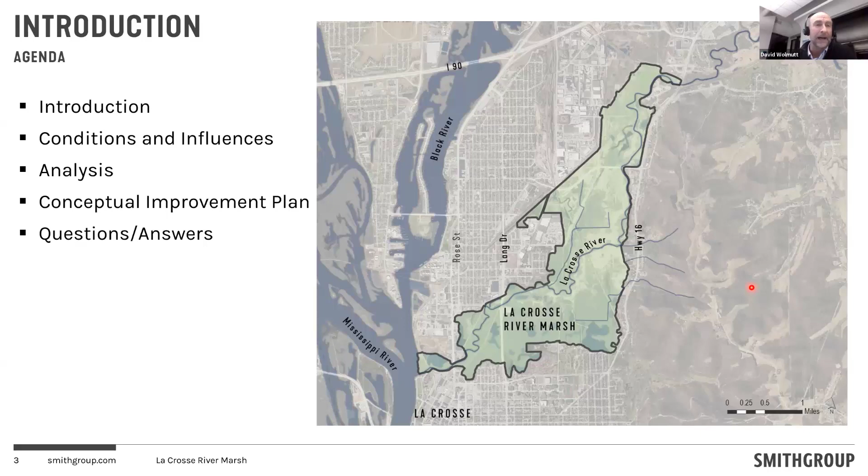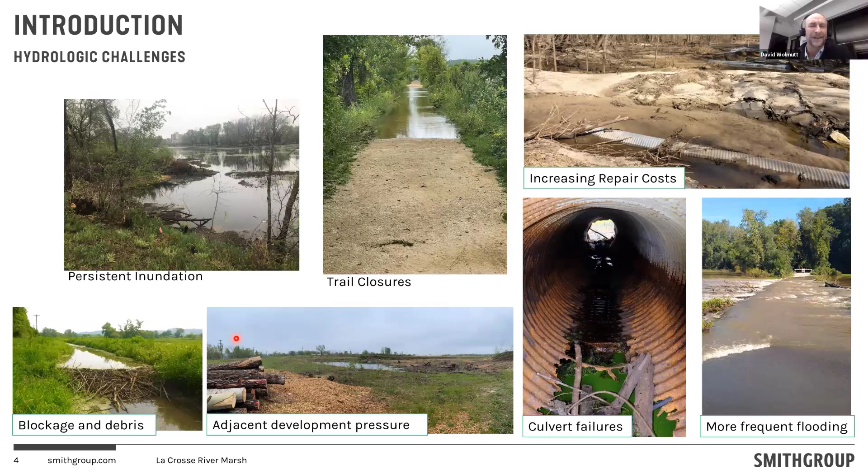There are development pressures that we want to make sure the marsh is protected against. And of course, the ongoing issues with our friends, the beavers, which slow down drainage, and they're a natural feature, but they can be a nuisance sometimes.

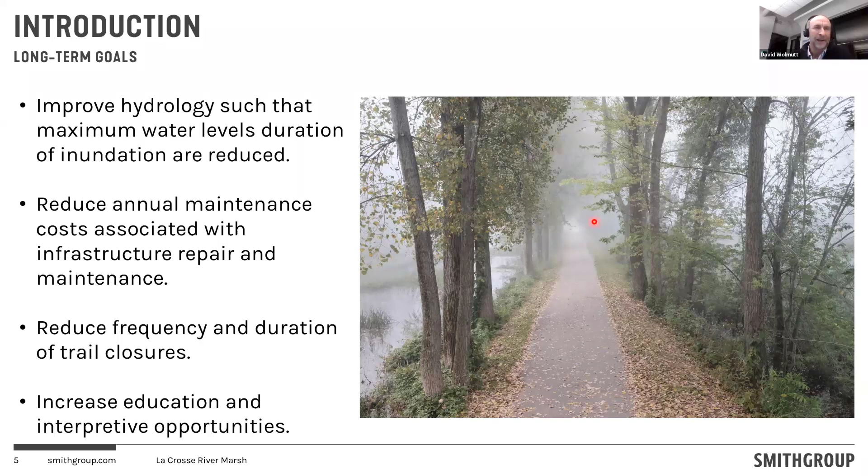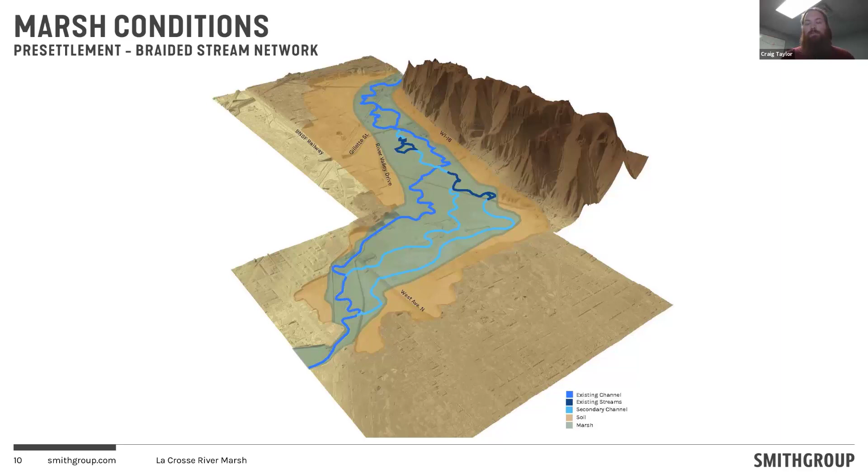Next slide, please. So by looking at some of the channel scars, every time a channel moves through a landscape, it leaves a scar on the surface. And by looking at some of the scar patterns, we believe that there were at least 3 different channel alignments through the marsh at some point in its history. And they've been forced into this single channel due to encroachments in the floodplain. So some of those encroachments are roadways, rail lines, abandoned rail lines, trail crossings.

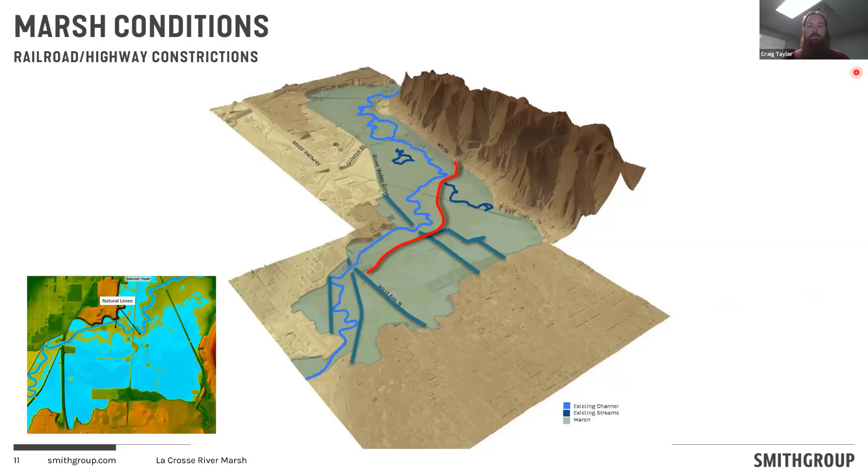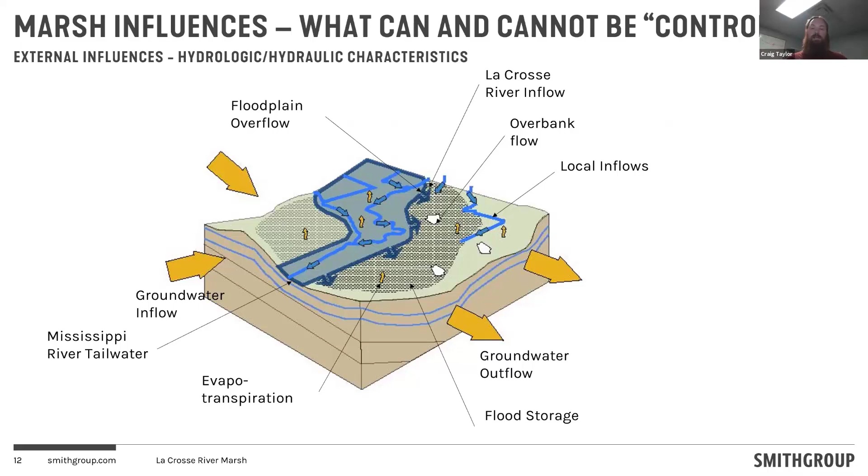So once we consider what the river wants to be, we have to think about how we can facilitate that change. And this diagram identifies quite a few different marsh influencers and how we can manipulate them. Some are very difficult to manipulate and some are impossible to manipulate. Unfortunately, none of them are easy to manipulate. But that doesn't stop us from trying. We can still make good progress by understanding which ones are the most important. So stepping through those on the next slide.

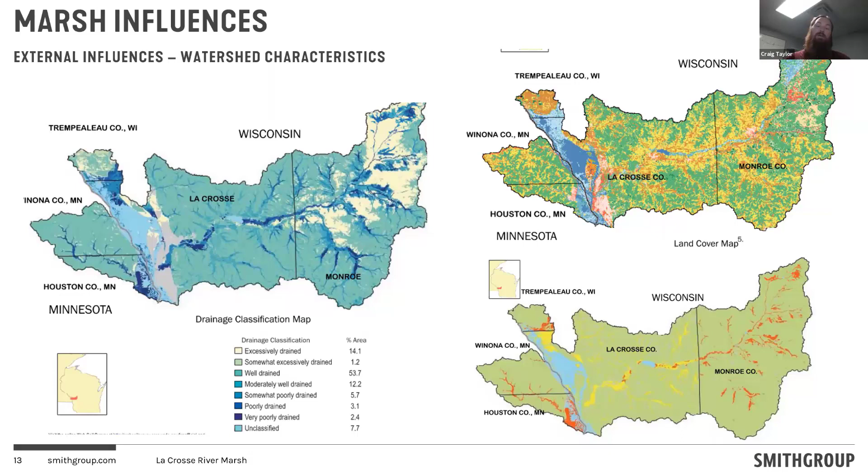First of all, what's happening upstream in the watershed is a major manipulator, right? They are a major controller. So things like land use and soil types and just how steep the landscape is all influence the amount of water that's coming down the river during various flood events. Most of those are outside of our control. Next slide, please.

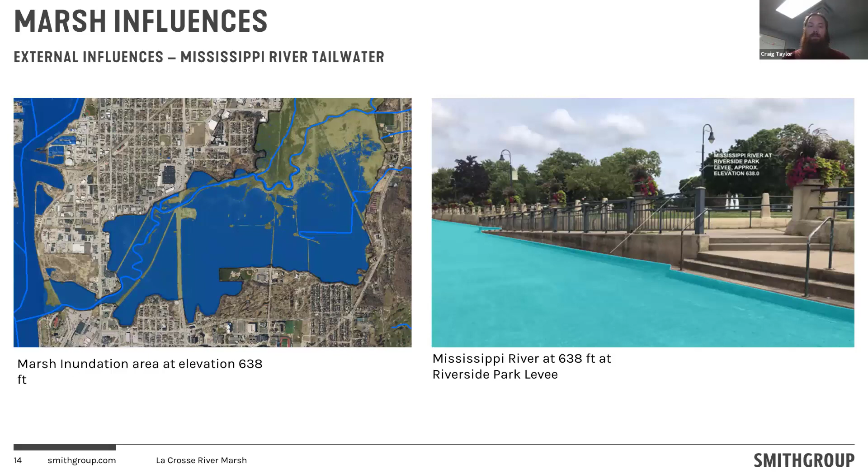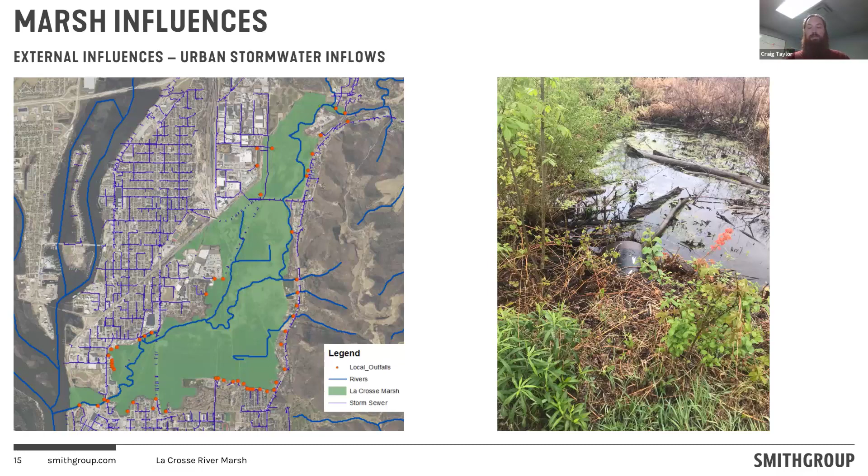Third, we have the city of La Crosse, an urban landscape on both sides of the marsh. It generates urban stormwater that flows directly into the marsh. We do have the ability to manipulate some of those flows, and through a permitting process that the city of La Crosse has gone through called MS4, they've started taking the steps to control their stormwater and reduce runoff volumes into the marsh. So that is a great path forward. It will be effective in the long run. It will take time to implement though. Next slide.

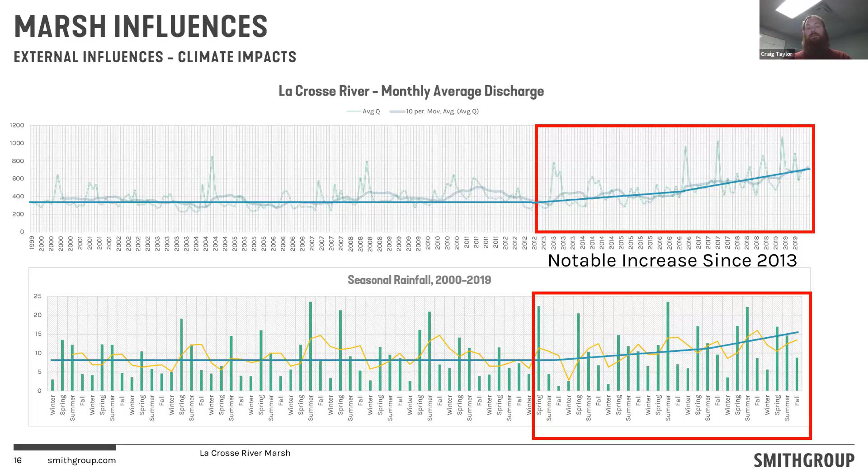Next is climate change. Rainfall has been progressively increasing, and since 2013, the last 9 years or so, the rate of discharge in the La Crosse River has increased by an impressive amount. So that is partially due to climate change. It's also partially due to developments within the watershed. So some of those developments, by using good practices through the MS4 process, some of those flows can be mitigated, but the climate change flows, there's not much we can do about them.

Next slide. Internal influences on the way the marsh performs. Topography is the obvious starting point. So the shape of the marsh, the high points and the low points, and where those exist have a great influence on the way floodwaters move through the system. We have almost infinite control over those, although it is rather expensive and labor intensive to move materials around in the marsh.

So we do want to be aware of those options and use them where necessary, but be limited in our direct interventions to the landscape themselves.

Next slide. Internal flow patterns, so how water moves around the site. As I mentioned before, we believe the marsh used to be an anastomosing system, so water kind of found its own path through the marsh, and it's been cut off by various crossings. All of those crossings, when they were built, had culverts placed in them, so water can still move around the site in theory. Unfortunately, many of those culvert crossings have either become fouled with debris and sediment, or they simply weren't designed with anastomosing systems in mind. So next slide.

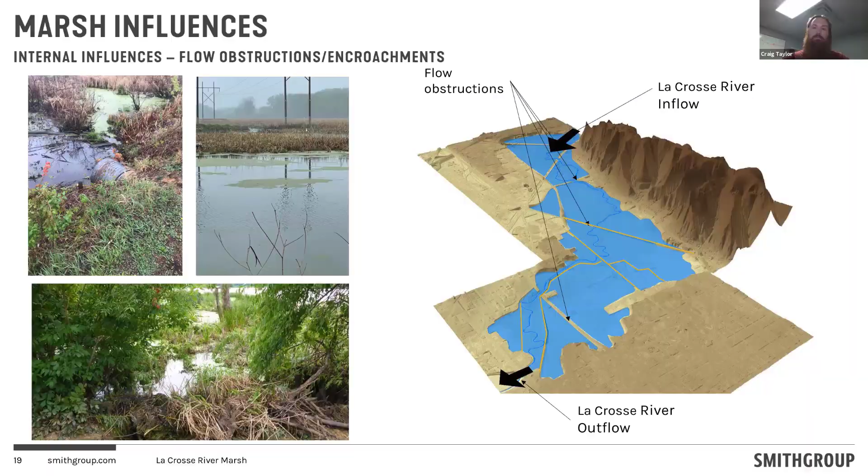So on the hydraulic analysis side, we did some moderately sophisticated numeric modeling using a software developed by the Army Corps of Engineers called HEC-RAS. It allows us to run synthetic flood events through the marsh and see how the water moves through the marsh and where water may be trapped or isolated.

We looked at two events. One was a small flood that occurred in 2007. It's about the size flood that you would see every other year or so. One was a moderate to large size flood that occurred in 2017. Next slide.

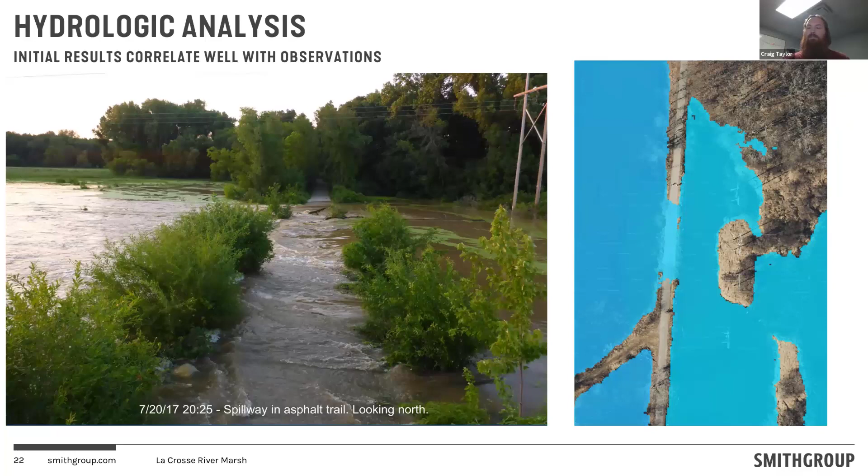The image on the right is an aerial photo of that spillway location, and the blue overlay on that is the flood extents around that time. And the general extents are lining up fairly well with what was observed.

And so, pre-settlement conditions, we would have expected these waters that flood up into the marsh to have drained back out in about a week. And in our simulations of the storms that are happening today, that water is hanging out for 3 to 4 weeks. So not only is it just hanging around longer and we're seeing more open water within the marsh, the extended flooding in the marsh is changing the habitat and vegetation palettes throughout.

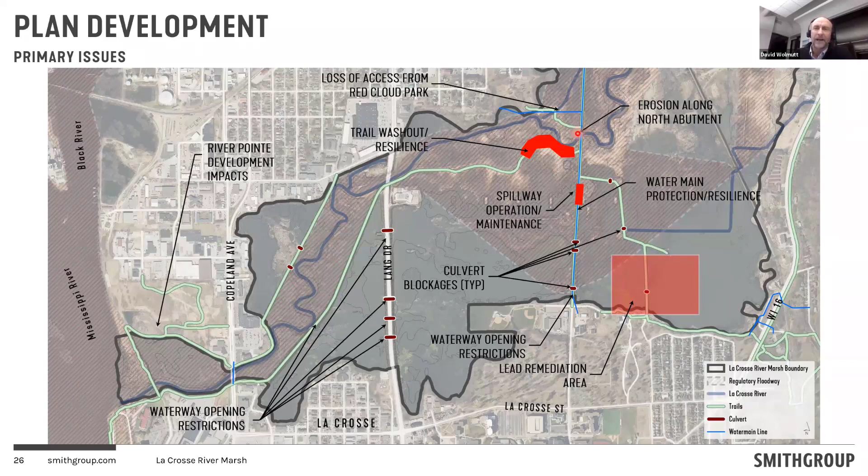Some of the constraints: whenever we look at a project like this, we need to understand the opportunities and what is going to impact our ability to do the things we want to do out there. In the case of the marsh, one of the big things is it's a wetland. Construction of anything in a wetland is very sensitive and requires a great deal of permitting and interaction with regulatory agencies such as DNR and the Corps of Engineers. Anything that we do in the marsh, our goal is to enhance the marsh. So I think there's a lot of opportunity to work with the regulatory agencies, but regardless, there are a lot of hoops to jump through. So anything we can do to minimize those impacts is beneficial.

I mentioned the water main. I'll get into this in a little more detail later, but that's a huge item that we have to consider when we're looking at any improvements, especially along the Grand Crossing Trail. There's also a piece that goes under the route of the Red Cloud Trail, so we need to look at that. The entire area is in the floodplain and floodway of the La Crosse River itself.

Basically, the floodplain is defined as the area that is inundated during a 100-year storm on the river. The floodway, without getting into a lot of detail, is the area that carries most of the water, and it's much more highly regulated even than the floodplain. So anything we do within these areas, we need to be able to demonstrate that we're not increasing the flood elevation. For instance, in a perfect world, it'd be nice to be able to raise these trails above the 100-year flood elevation altogether.

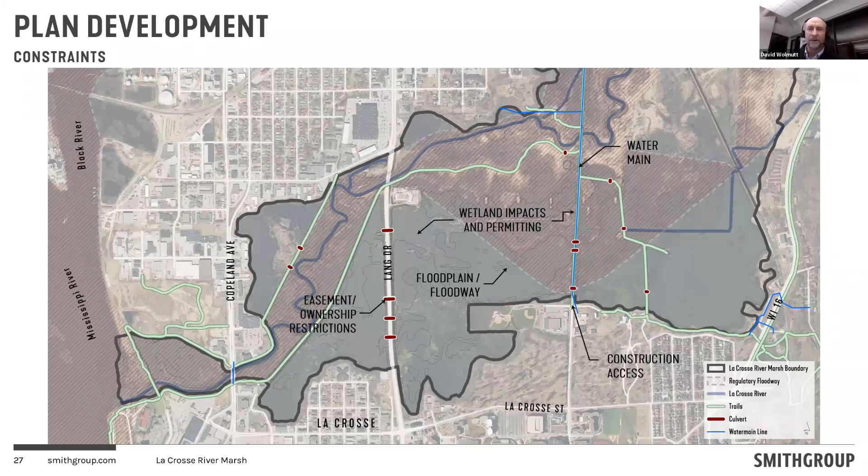So just some of the real big picture long-term objectives, and I think I've kind of touched on this, but we want to improve the trail and the water main resilience. We want to improve those north-south connections, and we want to reestablish a flow route or improve drainage through the marsh. And I'm referring to this as reestablishing Silver Creek.

There is some flexibility. I don't know that we would establish what existed there in the 1800s, but the southern portion of the marsh, generally north of Myrick Park, and kind of through a corridor like this, is basically the topographically lowest point. So if we can improve the drainage through the lower portions, it's going to help lower the water level, or at least lower the duration of ponding throughout the marsh. So this is kind of a target area that we're looking at for drawing water down.

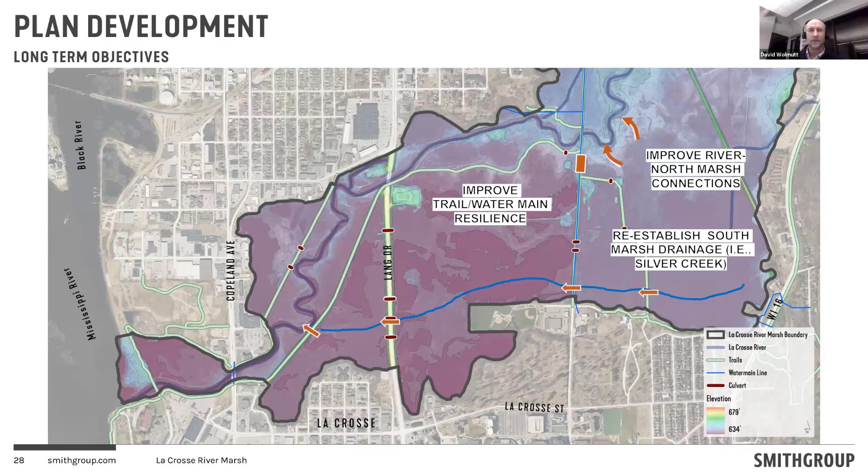So with that in mind, once again, talking about our general path to improvements, Craig talked about the former Silver Creek route coming through. He talked about the idea that there are certain interventions that we can take affecting topography. The most logical places to implement those interventions are at these existing embankment areas. It doesn't make a lot of sense to get into the middle of the marsh. It'd be very challenging and very impactful to try and excavate in the middle of the marsh. So it probably doesn't make sense to do much, but there is a focus we can make.

So big picture, some of the initial projects we're looking at have to do with improving marsh drainage through these embankments, with the goal of initially creating some openings in these areas so that over time, when we get a more positive flow pattern, we could reestablish more of a flow pattern through these. So, trying to restore these areas to less of an open water environment and more of a natural marsh condition.

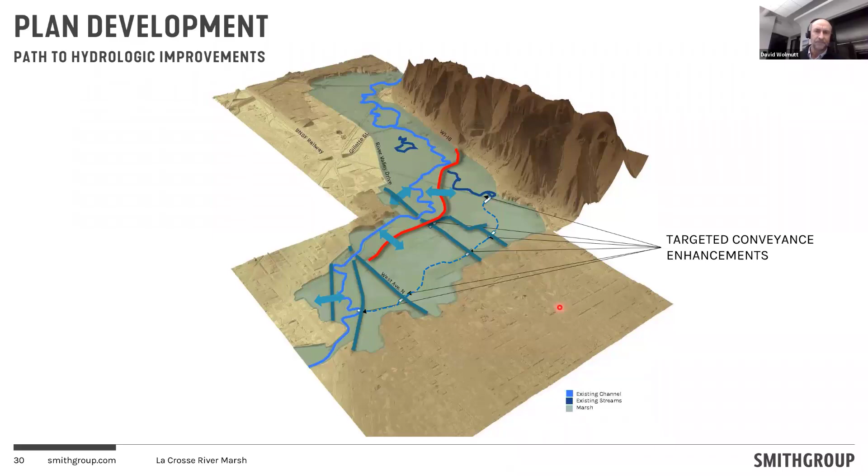So now I'm gonna kind of transition into some of the specific measures that we've been looking at. And Leah, I'll stop once more just to see if anybody did have any questions as I'm moving forward. We've got a few coming in, but I think I'm going to save them till the end. But keep them coming. Okay, that's fine.

Okay, so anyway, I want to talk about some of the specific ways that we go about trying to enhance access while minimizing our footprint on the marsh and helping enhance drainage. The first piece of infrastructure that most people are likely familiar with in marsh environments are boardwalks. And the traditional boardwalk is basically a treated wood deck that's built on piers of some sort.

I've got some photographs here on the right-hand side of a project we did a few years ago in Clarksville, Tennessee. But as you can see, the idea is to elevate the walkway above the marsh elevation. This is the piece that was under construction. It provides some area for water to flow beneath it, elevates the path so it's not perpetually flooded, and it takes up a minimal amount of footprint. Unlike a path that's built on a traditional embankment, you don't have the fill that extends out from the boardwalk. So you're not impacting the resources that you're trying to protect as much.

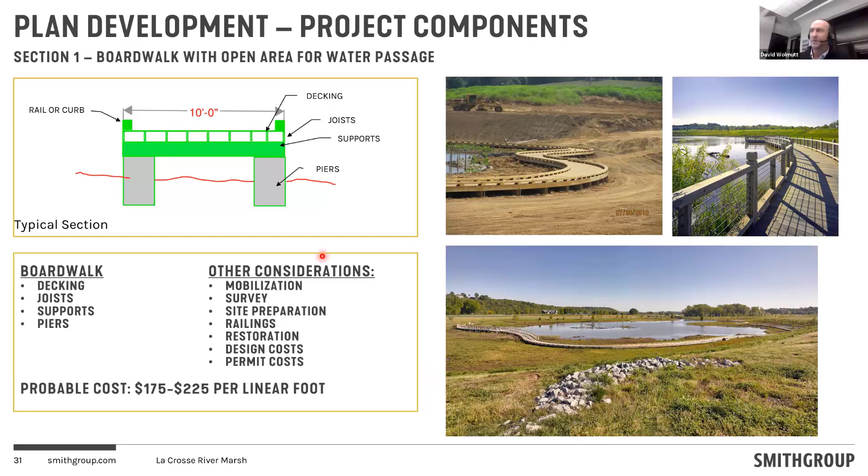An alternative to a traditional boardwalk such as that is a proprietary system called PermaTrak. There's other systems that are similar, but rather than being a wood boardwalk, each of these pieces are built of precast concrete. So they're much more durable. They can withstand a higher load. They're quite a bit more expensive. A traditional wood boardwalk is $175 to $225 a foot.

A PermaTrak boardwalk is quite a bit more expensive, but on the flip side, this may have a longevity of more like 50 to 75 years. It's also easier for snow removal than a traditional wood boardwalk. It can carry a higher load. So in a situation such as when we're trying to access the water main, you can bring in more equipment or heavier equipment and things like that.

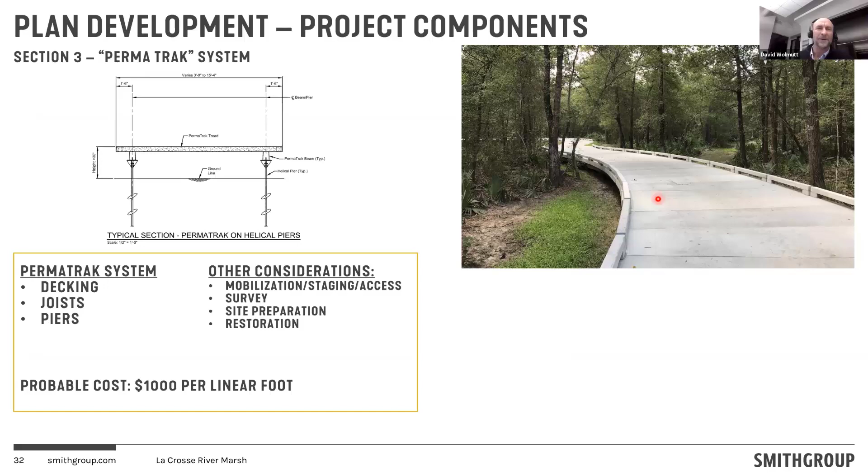So I think one of the conversations we had with the friends in the city, and my personal preference is I like the look of a traditional wood boardwalk much better, but we're looking at pragmatism along with what works the best. So anyway, this is another approach that we've looked at.

A third approach is accepting that portions of the trail are going to wash out periodically. This approach would not necessarily raise the flood elevation or the overtopping elevation any more than it is, but what it would do would be save the city quite a bit of money down the line. I'm calling this a hardened trail concept. This is the existing embankment that the trail's built on, but it has a concrete cutoff wall and a hardened concrete section on the upstream and downstream side.

And what that does is, for instance, if you recall the photograph I had shown previously with water flowing over the spillway, you can see that there's quite a bit of velocity going over the top. And what that wants to do is it starts to wear away at the downstream side of the embankment, starts to erode, and then it basically washes out the culverts and everything else that's underneath. By putting this cutoff wall in, making this a more hardened surface, and putting vegetated stone or riprap, it's still going to overtop, but the city's not going to have to spend $10,000 and a lot of crew time every time it washes out. So there's benefits and disadvantages.

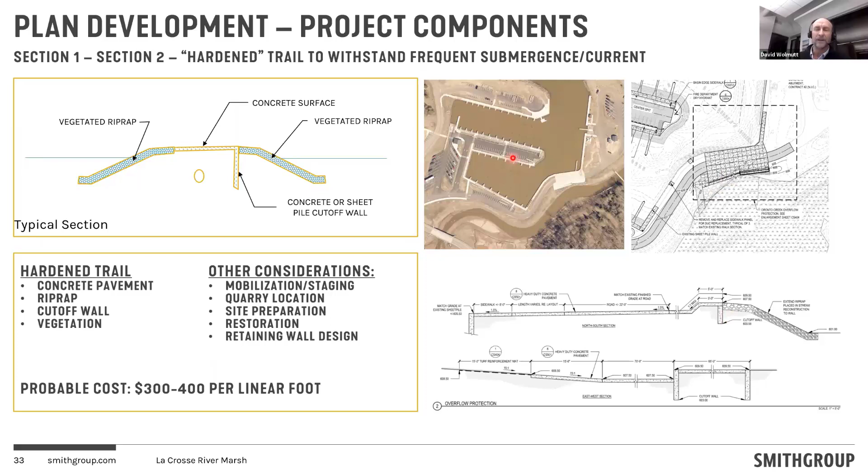This is just showing a similar application. This is up at Saxon Harbor, which experienced a pretty devastating flood a few years ago. And this is just an engineering detail showing a similar overflow route. In that case, we had a stream that came through that was prone to flooding once every couple of years. And rather than blowing out the entire embankment, this concrete spillway was constructed with a cutoff wall to prevent that from happening. And it's been very successful.

And then another type of section that I think most people are probably familiar with is just a traditional culvert. Basically it's a concrete tube or a metal tube, or basically an opening through the embankment that allows water to flow from one side to the other. And there are a number of culverts under the trails now. The problem is, in many cases, they're not set at the right elevation. They're blocked on the upstream and or downstream end, or they're sized too small. So there are a number of areas where just a culvert replacement or something along those lines is appropriate.

One of the challenges that we'll talk about a little bit, especially along the Grand Crossing Trail, is this little circle in here represents a water main, and that water main is running right where we would ideally want that pipe to be. So options include either relocating that water main, which gets very expensive, or placing the culvert at the proper elevation to facilitate drainage through there.

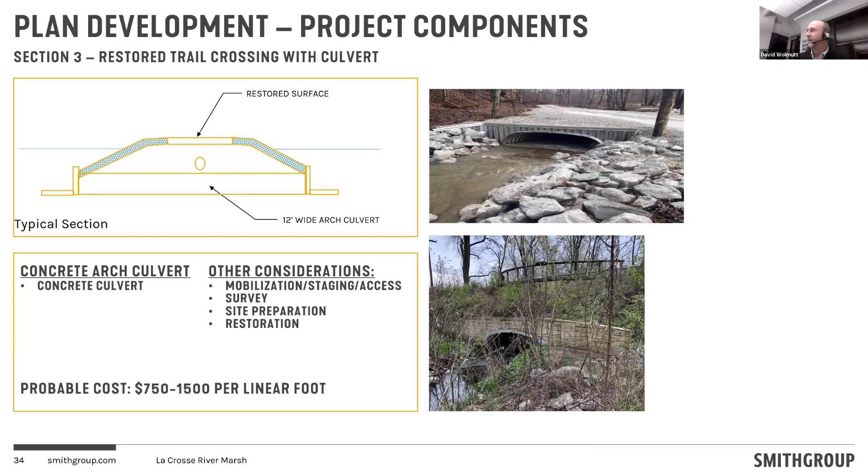So I think probably starting in June with the group, we started talking about some ideas for some general improvements. And basically we initially divided these into tier 1, tier 2, and tier 3 projects. And the tiers were identified based on what we felt would give us the most bang for the buck, and what would have the fewest number of complications.

Lang Drive was identified as a tier 2 rather than a tier 1 because we feel it's likely that any improvements of Lang Drive are going to have to be implemented in conjunction with future improvements that DOT will have planned in there. So there's going to be an interim step, probably a long interim step, where we meet with DOT, talk about what their plans are, when Lang Drive is slated for improvement, and collaboratively work with them to see what can be done to help achieve our marsh goals in there.

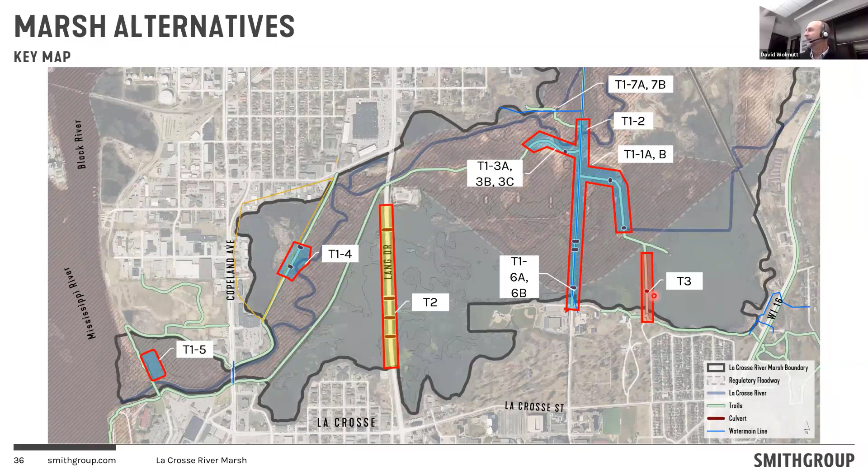Tier 3 is identified as a lower tier because we do not feel there's a benefit in implementing improvements in this area as long as the lead remediation program is still being developed and understood. One of the things we've talked about is maybe we can use the lead remediation project as a tool for implementing some of the improvements that we hope to achieve through here. Those discussions have not started yet, but from the standpoint of how we're approaching this, that's why this is a little lower tier, because we don't believe that's something that should happen until that issue gets resolved.

And I'm not going to go through all this, but this is a matrix that we put together and presented to the group initially as kind of a talking point. Basically, we developed a number of these alternatives for some of the different areas and applied a somewhat quantitative, not overly scientific, scoring system to some of the challenges, meaning if a project would involve more floodplain and floodway fill than another project, it scored lower, as an example.

And then we looked at that also from the standpoint of benefits. A project that may be more conducive to outside funding, for example, was given a higher score than one that may not. So we weighed these all together, and this was not the decision matrix itself that we used to prioritize projects, but it was a tool that we used for discussion with the group.

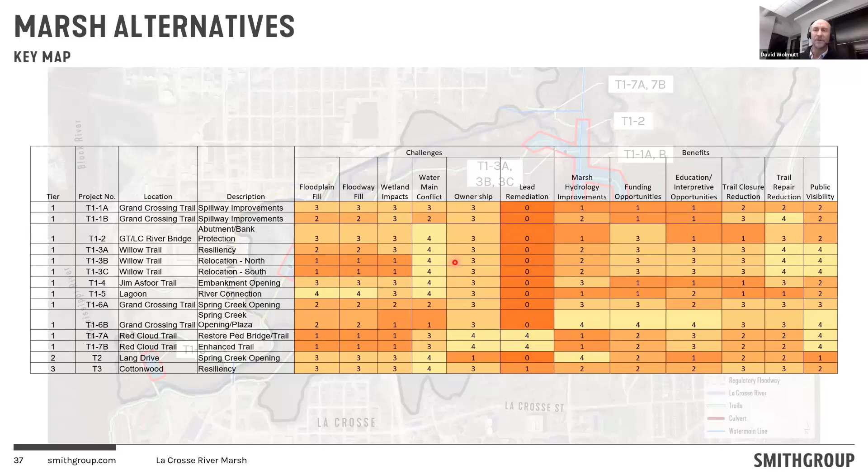So with that, I'm going to go into a little bit more detail on some of the specific projects that we arrived at. And once again, I want to caveat this, that this is a high level framework master plan at this point. We have not done any detailed design. It's a long ways to go on this, but the goal here was to try and identify where we should focus our efforts and where we should start moving forward.

So the first location here is at the Grand Crossing Trail. Once again, the Grand Crossing Trail is basically the trail that runs from East Avenue northward, just about to River Valley Road. It's one of the main links, probably from campus to the State Trail farther to the north, and to the Willow Trail and everything else going east-west. But anyway, the first project in here is at the spillway itself.

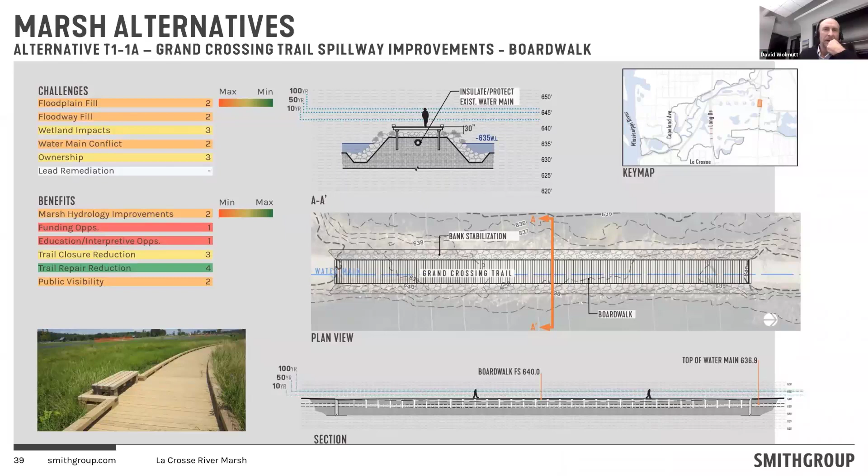Sounds good. All right. So the second approach that we looked at to the Grand Crossing Trail is, once again, the hardened trail idea. Once again, having the cutoff walls, in this case, because the water likes to flow both directions over the trail, we would probably have cutoff walls on both sides.

We'd have a hardened, probably a concrete surface at the spillway, and we'd be placing stone to better protect from the scour. And as I mentioned in the introduction, in this case, rather than raising the trail 1.5 feet or 2 feet, it would stay at the same grade as it is now. So this would not necessarily help the trail stay open more than it does now as a standalone project, but it would be very beneficial in that once the water goes down, the likelihood of it washing away the culverts in the path and having to be repaired would be greatly reduced.

It also does protect, one of the things we've talked about a little bit from an infrastructure standpoint is every time this trail fails, there is some risk of damage to that water main. And that water main, I don't want to speak for the water utility, but I don't believe there's a lot of redundancy in it right now. So there would be issues if there were failure of this water main. So it's important to protect the water main as well.

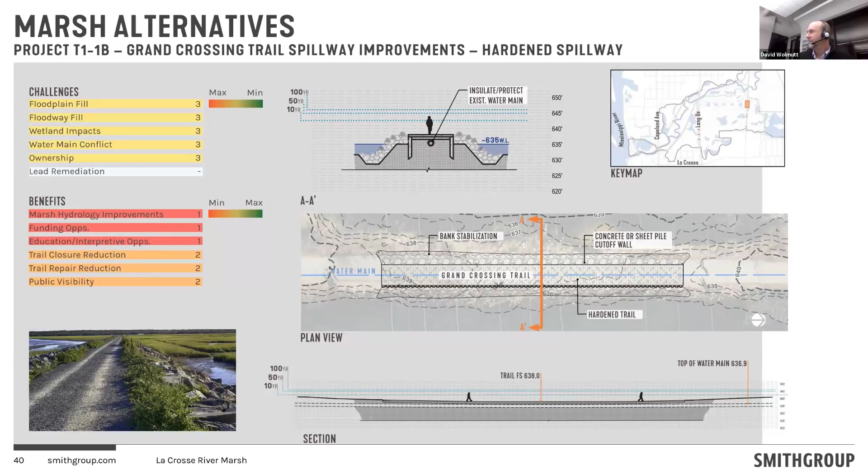But the issue here is there's a very sharp bend in the river just upstream from that bridge. And to Craig's point about the river wanting to migrate, it wants to migrate to the north. So it's been slowly eroding in this direction, and it's really been starting to undermine the north abutment of the bridge. And so there's some need for that to be attended to sooner rather than later.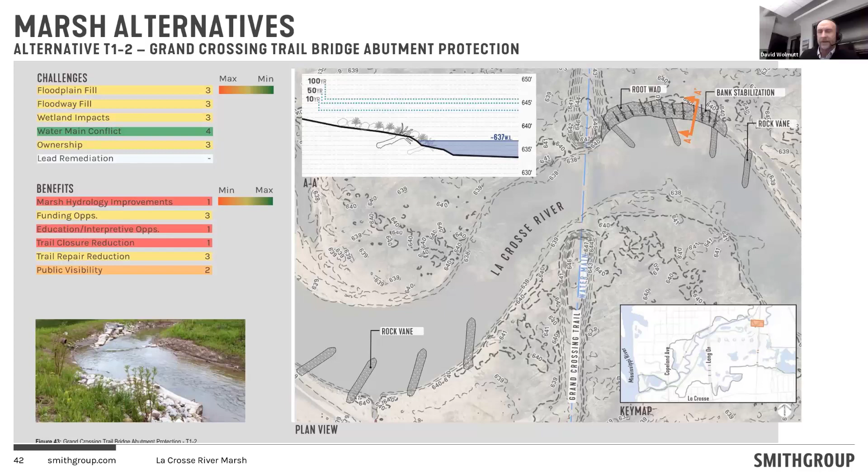So that brings us to the Willow Trail. Once again, the Willow Trail is basically the link from the Grand Crossing Trail on the east, and really is the main link ultimately to the Vietnam Veterans Trail and downstream. And this segment is everything from downtown all the way along the trail and all the way up north. This is really the main commuter route from the state trail to the north to downtown. So it's not only a recreational path, it's used for commuting and everything else. And so it is a pretty major area.

But the other issue is we are also near the outside of a stream bend, and the river is trying to migrate to the west. So, I'm sorry, to the south. So, it is at risk of being washed out, and it is frequently out of service for an extended period of time due to flooding. So it was considered a kind of high priority area.

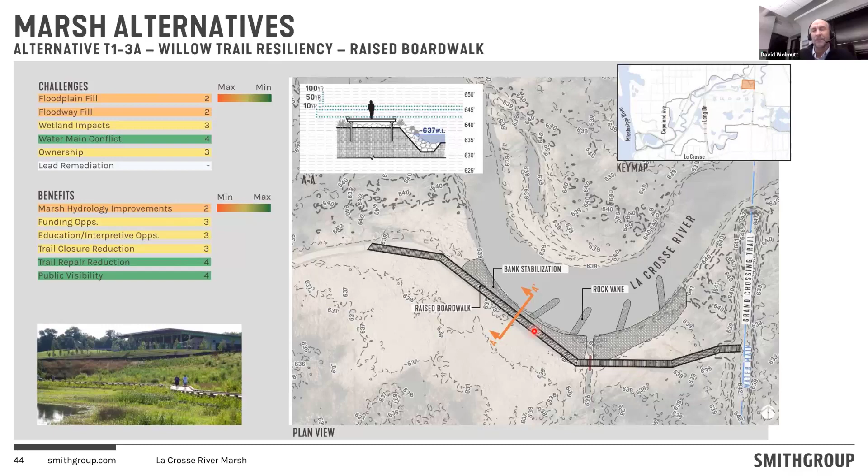That would potentially raise the level of service of the boardwalk from probably a 1 or 2 year period where it gets washed out now, not to mention the poor drainage, to maybe closer to a 5 or 10 year. Once again, it's in a floodplain and it would be prone to periodic washout, but this is a way to improve the resiliency. So that was one option we looked at there.

The second option is just move the trail. Once again, this would be a raised boardwalk, but look at relocating the trail farther to the south. There are a number of regulatory challenges with this. This would be nice to give it a little more of a factor of safety from the river migration itself, but there would be a pretty substantial amount of wetland disturbance moving it to the south. And I don't know, this is something we'd have to discuss with the regulatory agencies if this could be allowable in some way, but this was another option that we looked at anyway.

And to be clear, when we mention washout in this scenario, we're talking about flood inundation over the top of the trail and not structural damage to it. It'll be designed to withstand over time. Yeah, that's a good distinction, Craig. This would be designed with a footing, calculations to make sure that things like the uplift from flooding water would not damage it, and the lateral pressures from the water impounding on the side could be withstood. But yeah, when I say washout, it would mean it would be overtopped, not washed away.

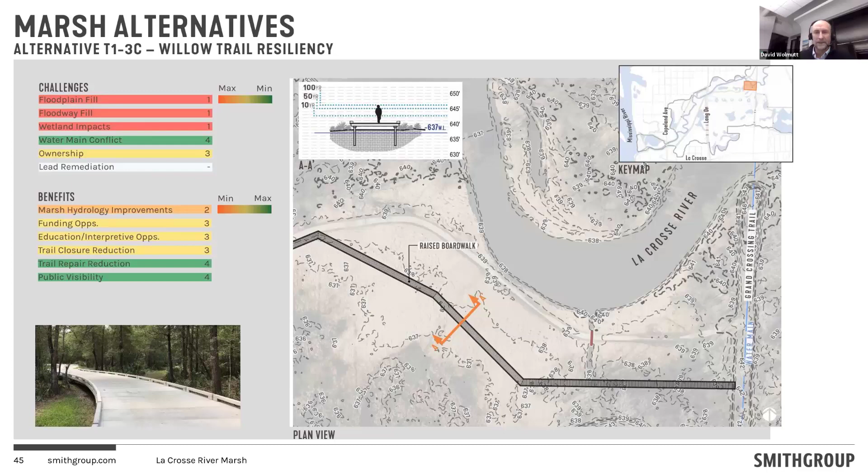Another location that we looked at is, I guess, on the very south end of the Grand Crossing Trail. And this is basically at the crossing of the old Silver Creek, one of the former drainage ways that came through here. Just a couple photo references. If you're familiar with it, this is that small trailhead that is just at the north end of East Avenue. And then this is looking farther north along the Grand Crossing Trail, just to get you in the ballpark there. But this, in my opinion, from a hydrologic standpoint, is one of the key areas that would be worthwhile to look at.

Once again, the water main crosses under the south, but historically there was an old railroad trestle that crossed for years up until, oh boy, I would probably have to defer to one of the Friends or one of the old timers out there, but my understanding is probably back in the early 70s or mid 70s that was replaced. And when the water main was constructed, the trestle was replaced with a couple of very small 24-inch culverts that cross under here that are pretty much completely buried now. So this is a source of substantial blockage and probably one of the sources that causes the east cell to have standing water for an extended duration.

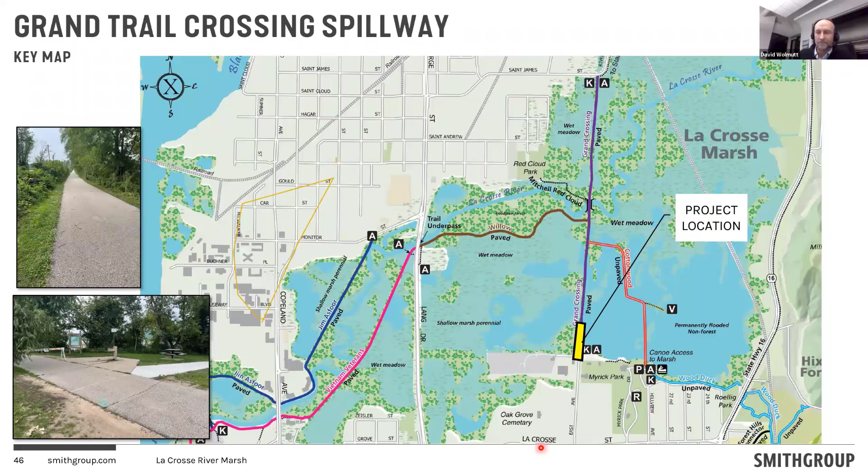So the idea here, the simplest idea here would simply be replace the existing buried 24-inch culverts with a larger culvert. And one of the ideas that we looked at would be like a 12-foot arch culvert. Once again, it's complicated by the fact that the water main is running through that area. So we would have to strike the right balance of getting the culvert at the correct location to allow the water to drain, probably doing some grading on either side of the embankment to daylight the culvert to make sure it could positively drain, and also providing adequate protection to the water main through insulation or other measures so we don't damage it.

Or alternatively, once again, in a perfect world, we would relocate that water main so we have a little more flexibility, but relocating a 24-inch water main is not an inexpensive item. So that's one of those things we would have to look at more closely as we're getting into more detailed design. So this solution is very beneficial in reducing the duration of ponding throughout that portion of the marsh. But like I said, there are some other challenges involved in it.

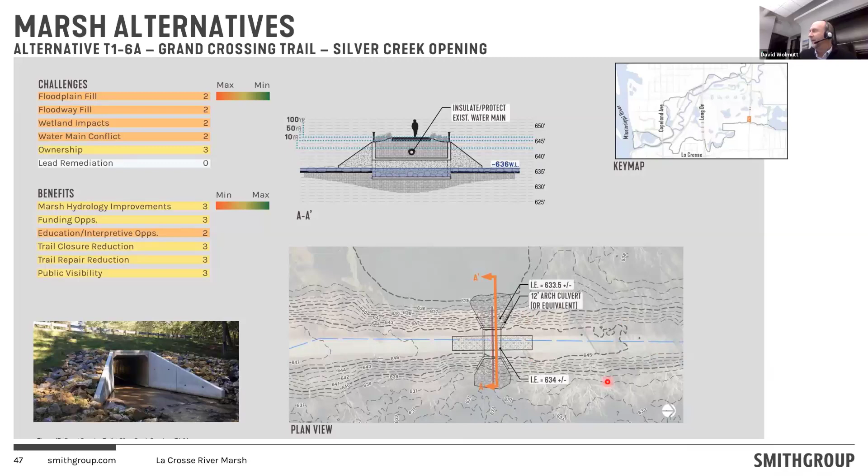Kind of a more grand concept that we looked at, and I'll get into some of the reasons for this, but this would be a little bit more of a, I guess, multifaceted project. First of all, as you can see here, the idea would be reestablishing kind of the historical pattern of flow in the old Silver Creek corridor in here. The other item or thought that we looked at here is that north end of East Avenue is a pretty major meeting spot and kind of a gateway to the marsh itself, but it's not real well marked out.

And this may be an opportunity to put something like an interpretive area here. It'd be an ideal area to have some signage or some storytelling about the old history of Silver Creek and how the marsh got to be what it is. It could be an interesting place, kind of an adjunct of the Myrick Center. Have a meeting area for people to meet here, and it could be kind of an interesting feature.

And I guess part of the reason we introduced a concept like this, recognizing it's not cheap by any stretch of the imagination, sometimes funding agencies or donors or other people that may be able to contribute that have an interest in this are much more interested in funding a project like this that's visible. It's not too exciting having a culvert named after you or something like that. But certainly a culvert or the hydrologic goals could be incorporated with a project like this.

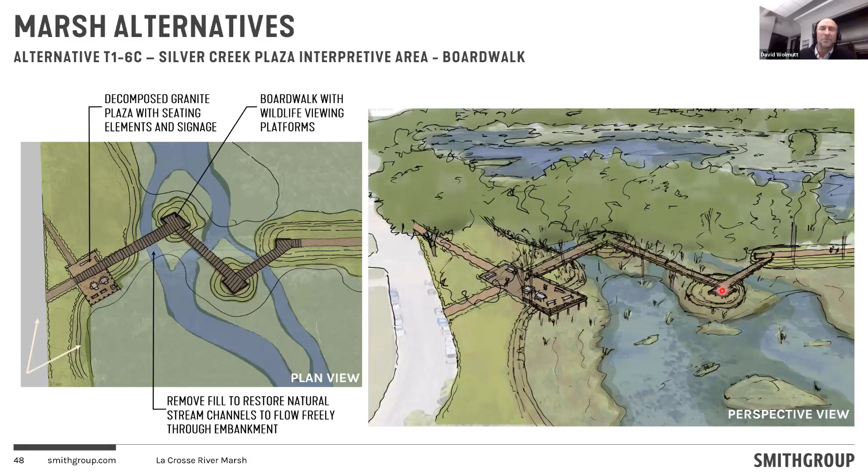So I think the last area that I was going to talk about is the Red Cloud Trail. Red Cloud Trail is the old trail that links just north of the bridge over the La Crosse River to Red Cloud Park and the neighborhood up in this area. I didn't have any real good pictures. This is kind of looking off into the woods in that general area. But the main issue there is this used to be a fairly prominent seasonal connection between the park and the trail. And because of the perennially high water and the poor condition of the stream crossing in here, it's rarely accessible anymore. And in this project the idea would be to reestablish that connection so it's more usable for a longer period of time.

And just a couple of ideas we put together. This first alternative, once again, would be kind of a combination of a paved trail, a boardwalk section, and an improved pedestrian crossing that would somewhat reestablish the link between the trail and Red Cloud Park. I think the current trail does not provide ADA accessibility or anything like that. So this is kind of the basics of what we would need to do to reestablish that trail.

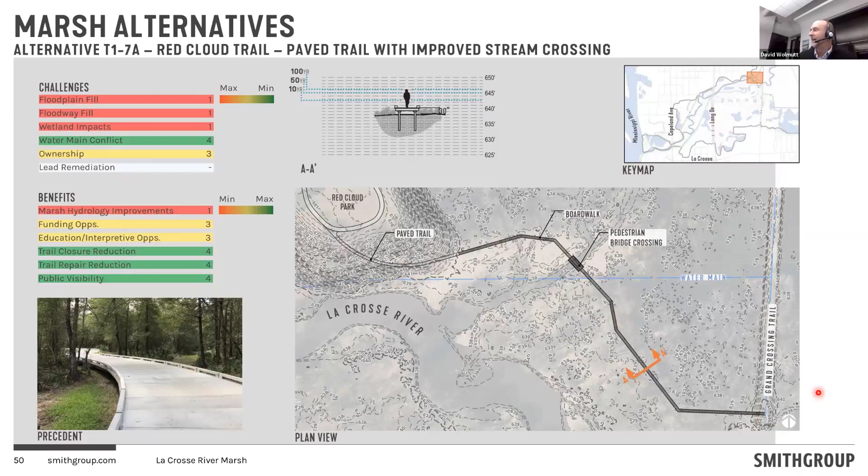A second option that we looked at that's a little bit more elaborate would combine a paved trail with a new pedestrian crossing, and then provide ADA accessibility up to the park and maybe some sort of a plaza with an overlook. And once again, this goes quite a bit beyond the mission of hydrologic improvement, but from the standpoint of placemaking and possible donor opportunities, and just to have a vision for something in the future, this was kind of an alternative that we put together.

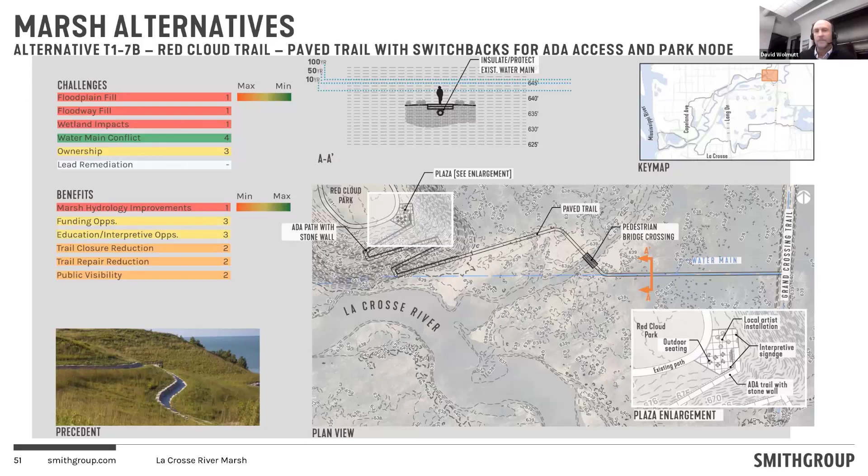A couple of other longer term projects, and I touched on this previously. I don't want to forget about the necessary improvements to Lang Drive or the Cottonwood Trail. We didn't develop specific alternatives right now for these because they are so contingent on other issues, but these are longer term projects that will continue to be studied as we move forward.

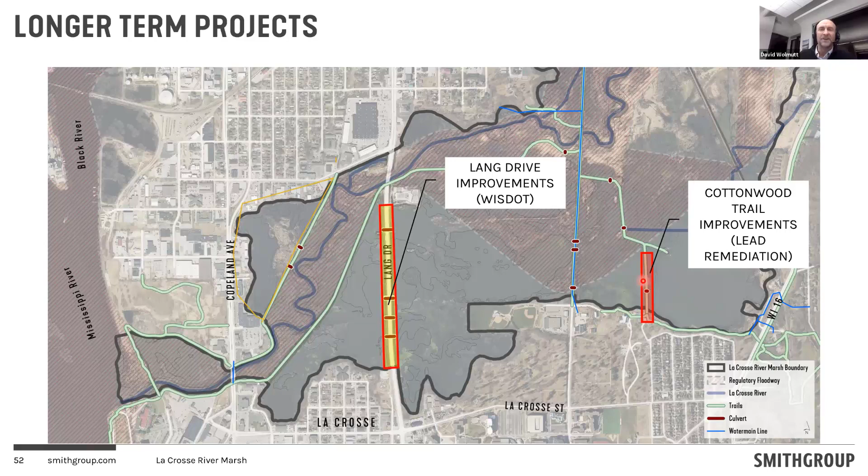Quick idea of costs, and these are very order of magnitude. As you probably gathered from my presentation, there are design issues such as how the water main is resolved, the materials that we use, the funding that becomes available either through grant projects or other sources. So I'm giving kind of a low and a high version of this.

For instance, the low version, I'm really generalizing of each of these, at the Grand Crossing Trail, the low would consist of probably just a rudimentary concrete spillway to improve the resilience. The higher cost would be more of a bridge or a Permatrak boardwalk.

So there's a huge range, but I think the main takeaway from this is just for these initial tier 1 projects to implement this, we're talking multi-million-dollar range, probably $2 to $4 million to start this out. So this is not a small endeavor by any stretch of the imagination.

The flip side of this is when you consider that the city is presently spending, and Leah, you can correct me if I misinterpret this, probably $10,000 after every major flood, and it's happening a few times a year for repairs, maintenance, and everything else. You can see that even though it's a large expenditure, if you look 25 to 50 years down the line, it's not such a large expenditure.

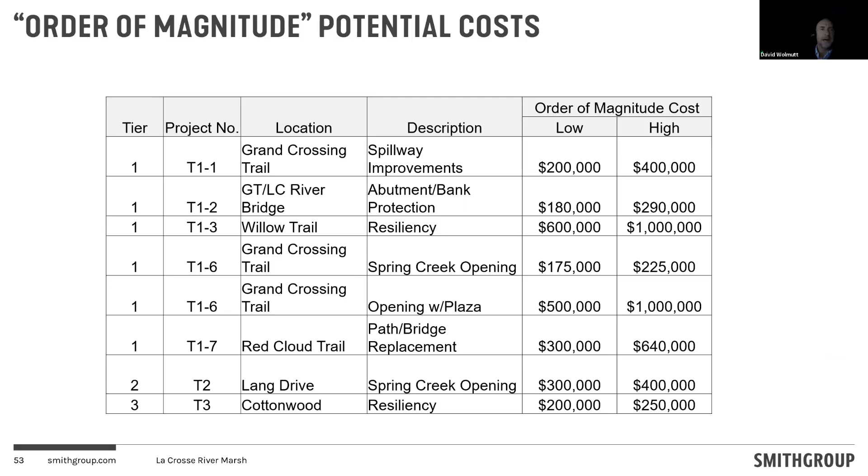So these costs, once again, will be developed a little bit further, but the idea was just to provide an order of magnitude of what some of these improvements may cost. And I'll just wrap up real quick. I want to leave some time for questions here.

I'm going back to the goals that we discussed early in the presentation, and just some general recommendations. The report that we did has probably 25 specific recommendations, so I'm lumping a lot of these together in the interest of generalization in time. But our initial goal, we talked about improving the hydrology such that maximum water level and duration of inundation are reduced.

Our general recommendation, this covers across many projects, strategically reestablish those hydraulic connections through the man-made embankments to improve the post-flood drainage. So basically, kind of prescribed interventions, I would call them.

As far as reducing the annual maintenance costs, the idea is replace those key low trail sections at a minimum with more resilient boardwalks or spillway sections that are made of concrete that even if they flood, they're not going to fail, and they're not going to cause the city to expend a lot of resources to repair. Once again, reducing the frequency and duration of trail closures, establishing those hydraulic connections, and ideally boardwalks where we can raise the elevations a little bit are ideal.

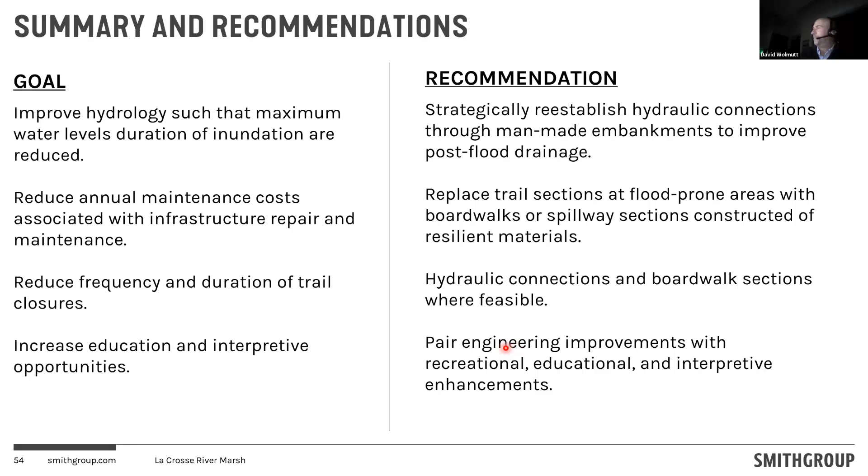And then increase the education and interpretive opportunities, pairing some of these engineering improvements that we talked about with recreational, educational, and interpretive opportunities wherever we can. Some other more near-term recommendations in the report: with this report, I think the city now has kind of an initial framework.

And I think next year it would make sense to start meeting with DNR, Corps of Engineers, and some of these regulatory agencies and start talking about some of these specific goals, getting some idea of what funding assistance may be available, what regulatory hurdles we would have to go through. A lot of these projects I don't think would be a routine regulatory process. It's more of a cooperative restoration process. And the earlier we start those discussions and express interest, the more we're in line for favor, I guess, financially and everything else.

Second item, initiate discussions with WisDOT regarding those Lang Drive improvements. Talk about their time frames and what cooperative approaches towards implementing improvements could happen. I know the DOT often gets blamed for some of their maybe past misdeeds, but there is money, especially with the infrastructure bill. They are falling under some of the same mandates to improve the environment as much as they can, and maybe there's a cooperative opportunity here. And I think the third item is start aggressively pursuing funding through state and federal grants or through potential donors.